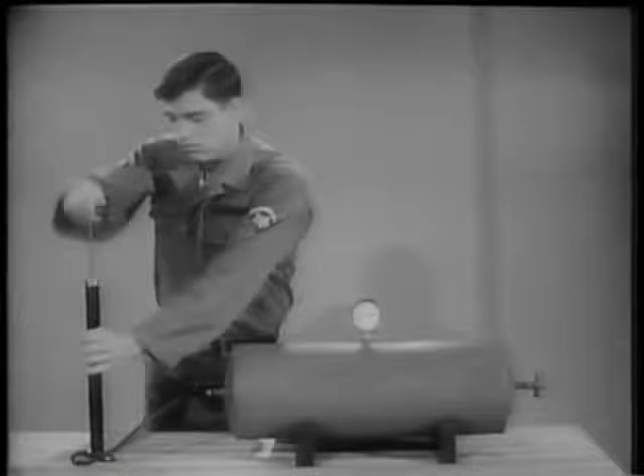Pressure of the air in the tank will increase. More and more air is being pressed into the same space. The compressed air inside the tank pushes against the tank walls and against the gauge.

The tank is a reservoir of compressed air. Even if the pump stops, the tank can deliver an even flow of air by adjusting the petcock.

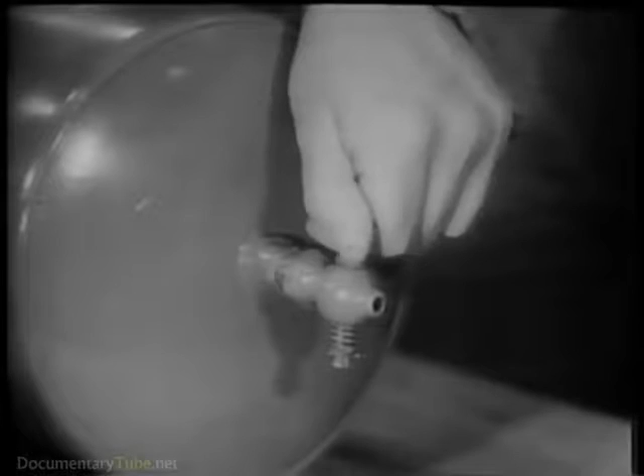As the air pressure escapes from the tank, the pressure will drop. When the petcock is closed, the pressure remains constant. In this case, 25 pounds per square inch, the usual pressure in an automobile tire.

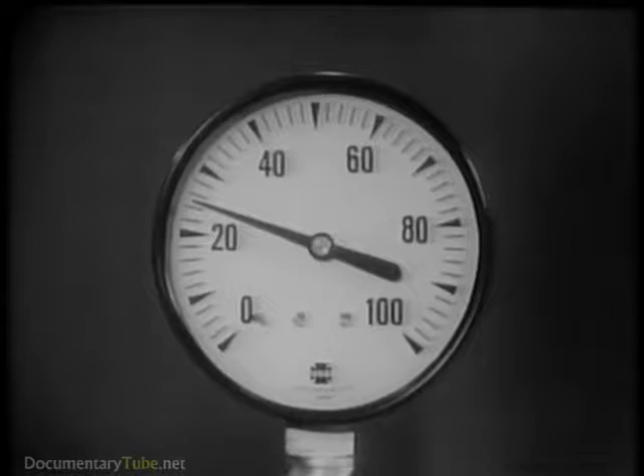This pressure can best be appreciated by showing its equivalent in weight, as demonstrated with this piston and cylinder sketch. 25 pounds per square inch of air pressure is exerting enough force on the bottom of the piston to support a total weight of 314 pounds.

Now, 90 pounds per square inch is the pressure at which air brakes operate. By increasing the air pressure on the same piston to 90 pounds per square inch, we find it will support a total weight of 1,130 pounds. In other words, 90 psi of air pressure is exerting 1,130 pounds of force.

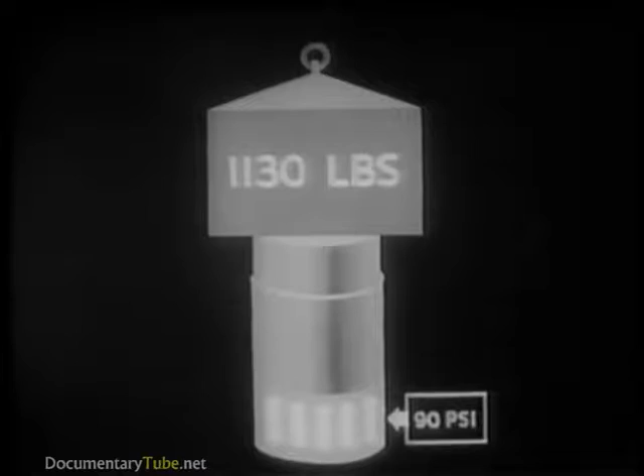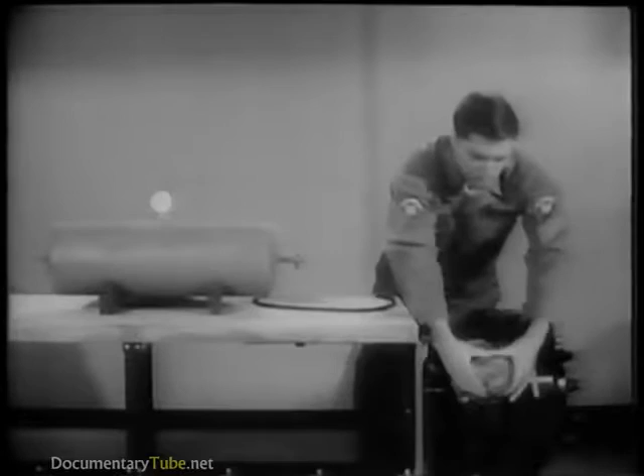How can this force be put to work? Let's insert a heavy rubber balloon into this plastic container and attach it to the wheel braking mechanism. What we're going to do is blow up the balloon so that we can actually see the air pressure, the balloon, pressing against the linkage.

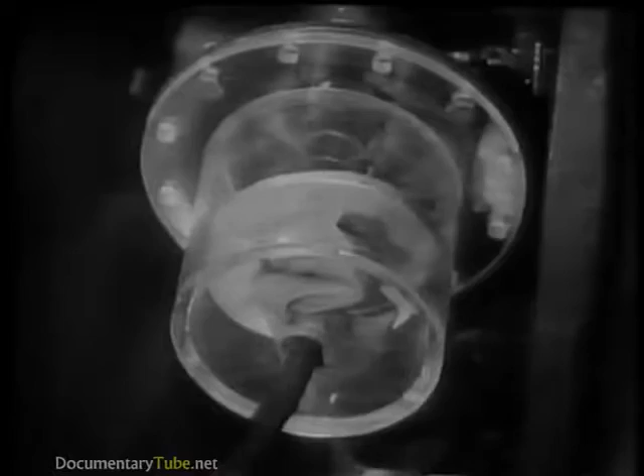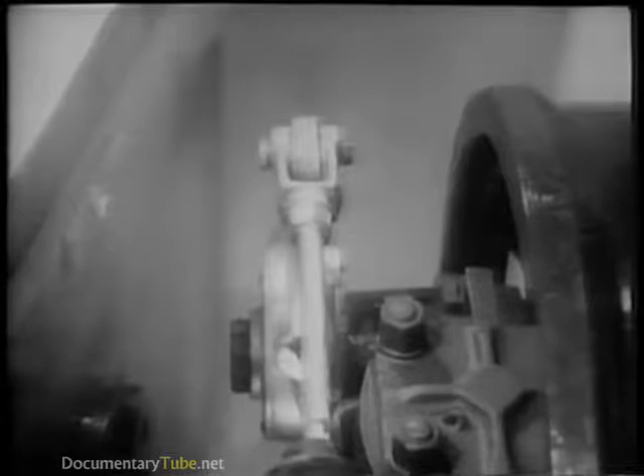We will get our pressure from the air tank, which is simulating the reservoir on large vehicles. The compressed air in the balloon can push the piston and linkage with enough force to actuate the wheel brake mechanism and apply the brakes.

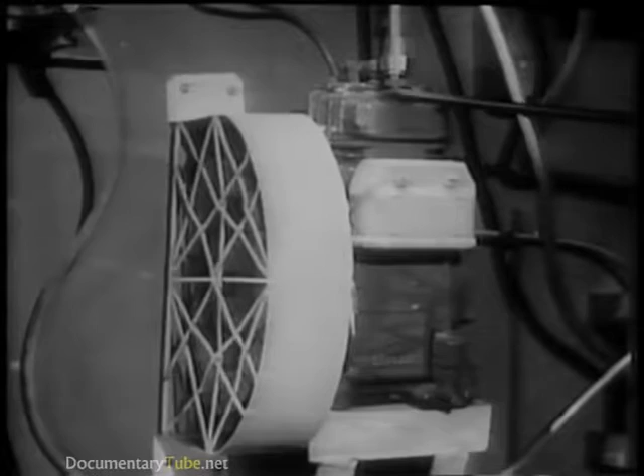The air brake system of an automotive vehicle works just this way. The compressor, which corresponds to the bicycle pump, supplies the compressed air. It is driven by the engine. In this demonstration, we're using an electric motor.

The compressed air is forced into two tanks. These two reservoirs ensure a sufficient supply of compressed air for any emergency. A safety valve is mounted on or near the reservoirs to protect the system and personnel in case excessive pressure should build up.

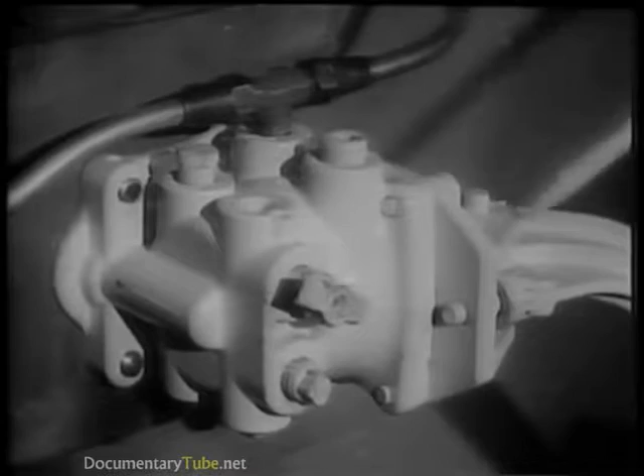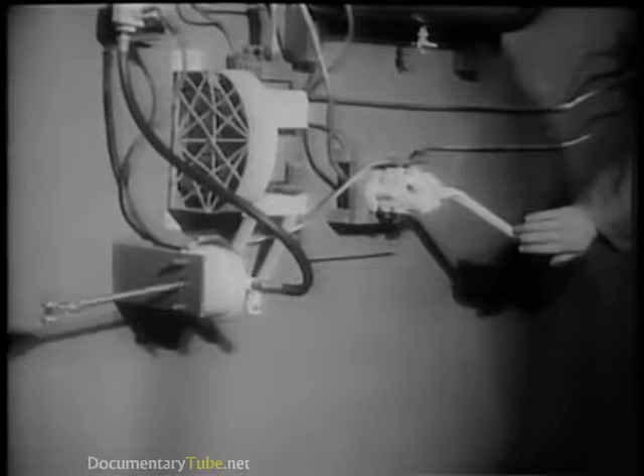Compressed air from the reservoirs goes to the brake valve, which is operated by the foot pedal. This is the brake valve, which is activated by the foot pedal. When the valve opens, air is permitted to rush from the reservoirs through the brake lines into the front and rear brake chambers located close to the wheels.

Each brake chamber does the same job as demonstrated by the rubber balloon. This brake chamber is the air-applied, spring-released type.

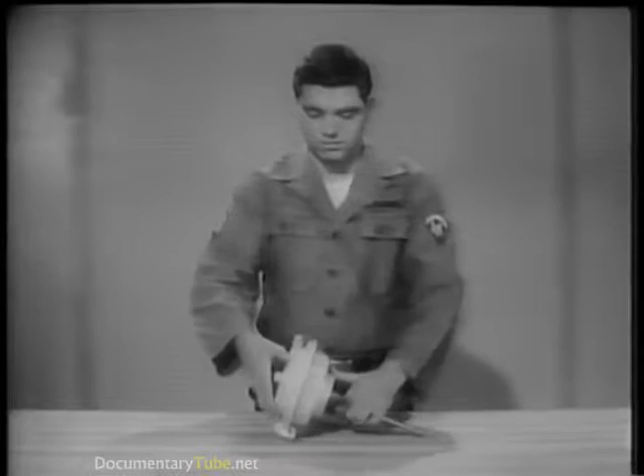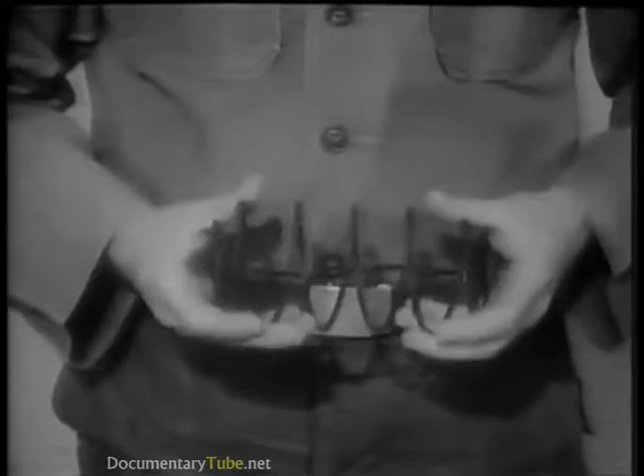Disassembled, it consists of the following components: the end cover and retaining ring, the flexible rubber diaphragm, the piston or plate, and push rod, the piston release spring, the main body and mounting point.

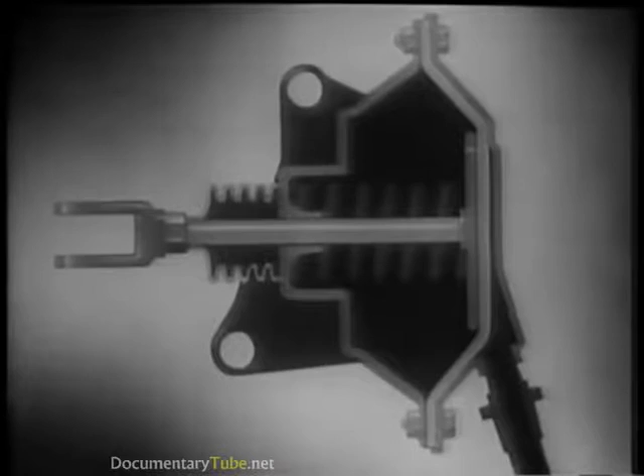The diaphragm will move the push rod plate when compressed air is admitted into the chamber. It operates the brake shoe through the linkage.

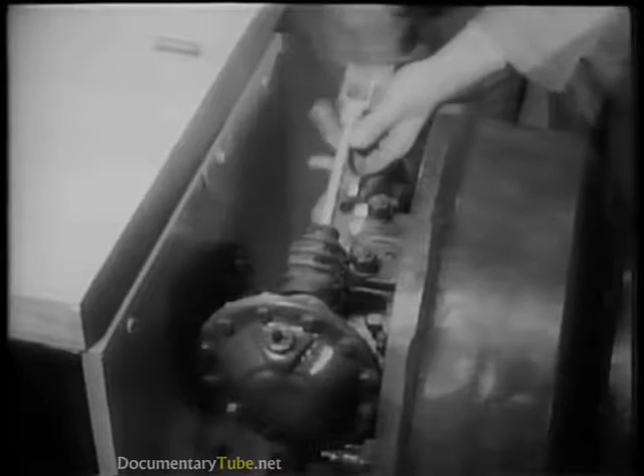The linkage consists of a slack adjuster mounted on a camshaft, and a push rod, which is connected to the slack adjuster with a pin. On the other end of the camshaft is the cam itself.

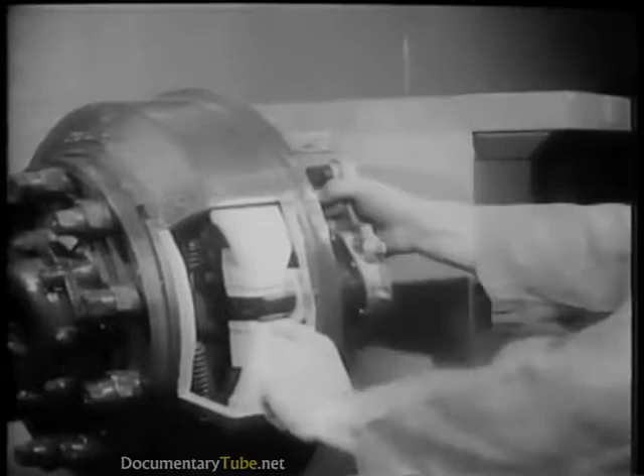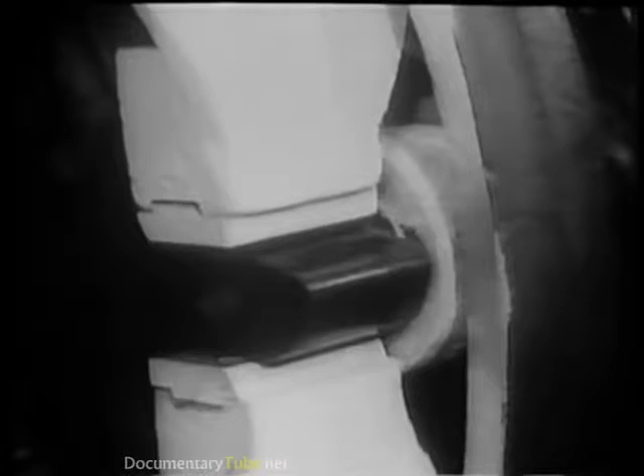When the push rod moves forward, it forces the slack adjuster to rotate the cam. This action spreads the brake shoes against the brake drum and stops the wheels. When the brakes are released, the compressed air in the brake chambers is allowed to escape through the brake valve.

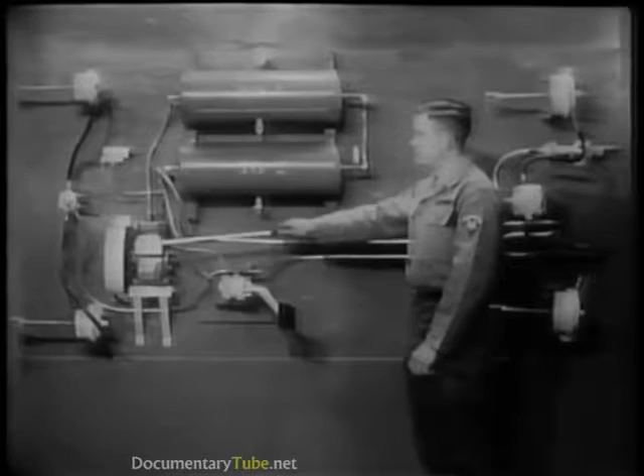It is hardly conceivable that a load of this size can be stopped with just a little air. How an air brake system works can best be seen on this demonstration board. Air enters the system through the air breather on the compressor. The air breather ensures that only clean air enters.

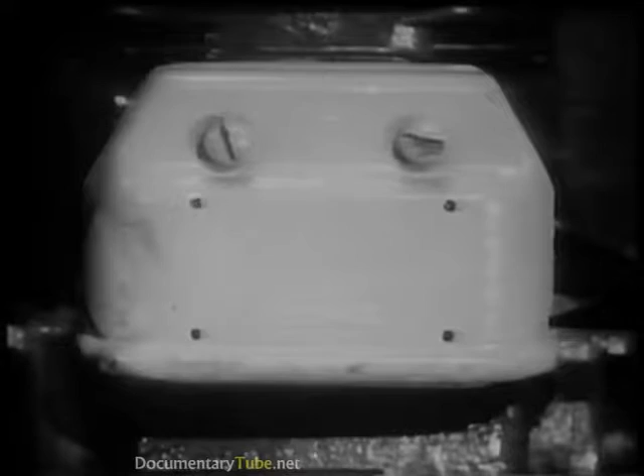The compressor is similar to an internal combustion engine. Most compressors contain 2 cylinders, in each of which a piston is moved up and down by a crankshaft. The holes in the cylinder walls are the air intake ports.

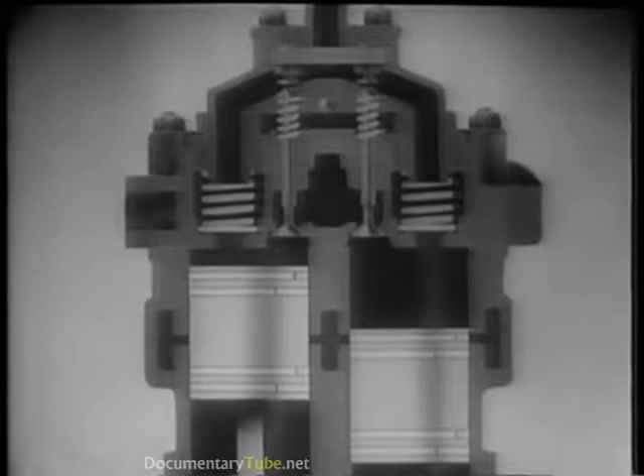The piston serves as the inlet valve by opening the inlet ports to draw fresh air into the cylinder as it nears the bottom of its downward stroke. It closes them to begin air compression on its upward stroke.

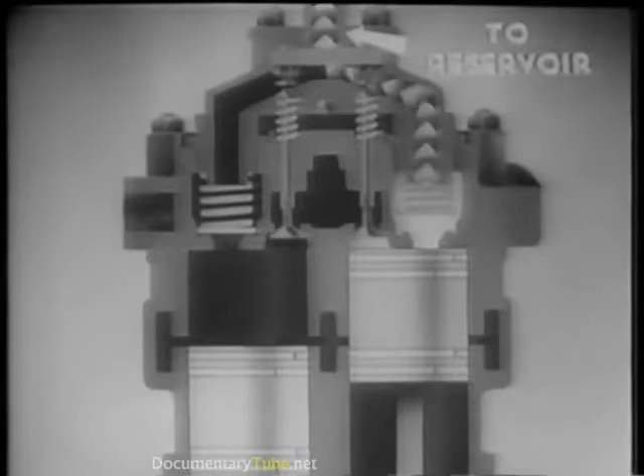When the piston reaches the top of its stroke, the pressure is great enough to open the discharge valve against the pressure of its spring. This forces the compressed air through the line into the reservoir. Watch this cycle of operation carefully.

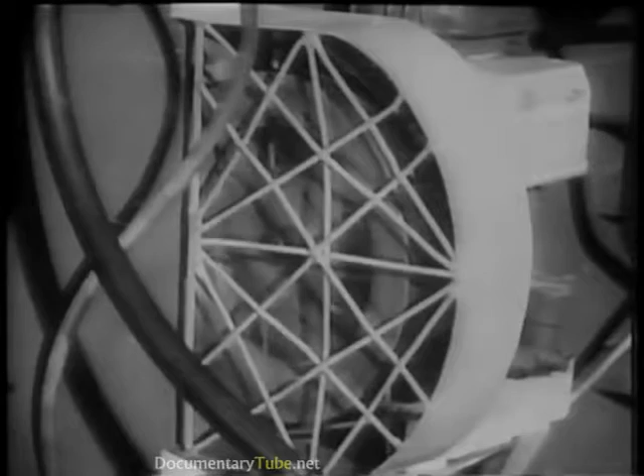Since the compressor is operating continuously when the engine is running, some means must be provided to prevent excessive pressure from building up in the reservoirs and to relieve the compressor of the strain of continuously pumping under load.

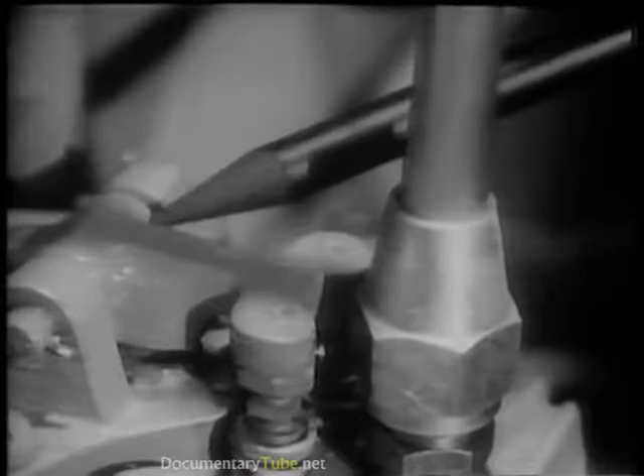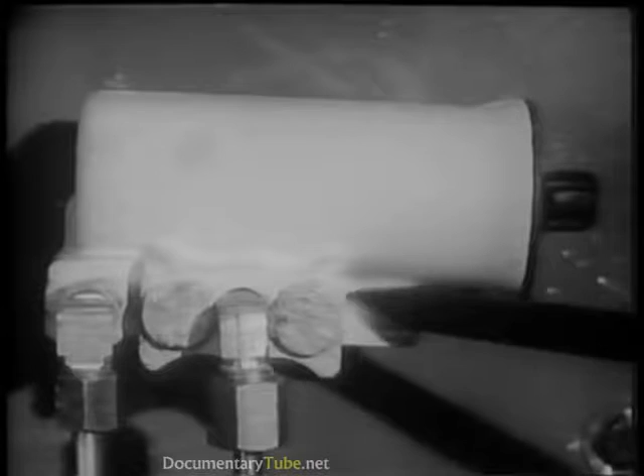That's the job of this section of the compressor known as the unloader head. It is controlled by a governor. The governor is connected between the main compressed air system and the unloader head of the compressor. The governor can be set to operate at a wide range of pressures simply by turning this adjusting screw.

The usual maximum is about 105 pounds per square inch.

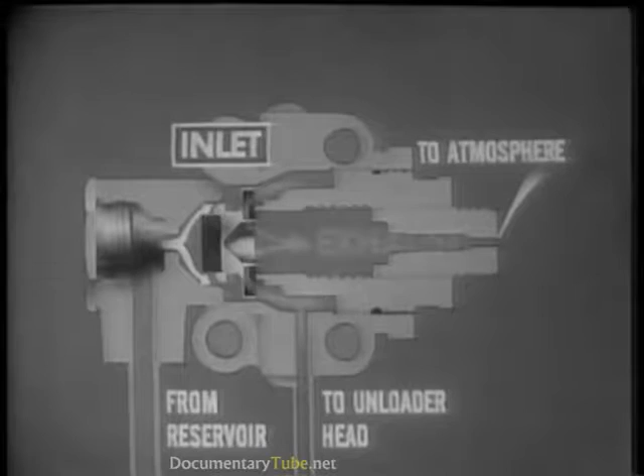Let's look at a cutaway view of a typical governor. The main component is a 2-way piston. This piston incorporates 2 valves, an inlet and an exhaust valve. The inlet valve is held closed by a spring and guide.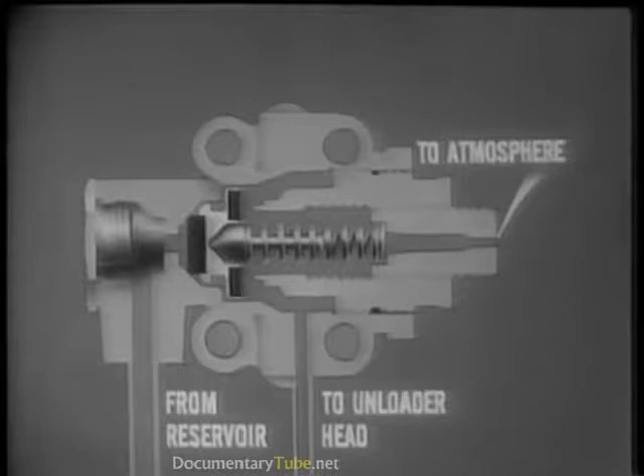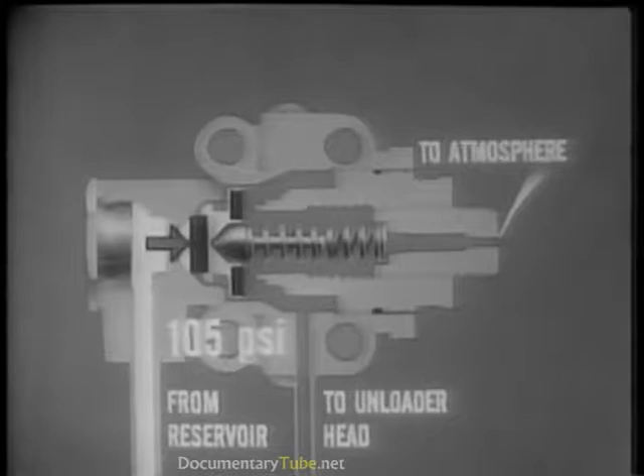Let's see how it operates. When the engine is started, air pressure from the reservoir increases in the system. You'll notice this air pressure is blocked by a spring-loaded valve. As the pressure increases and reaches the governor setting, or 105 psi, it overcomes the spring tension and moves the piston.

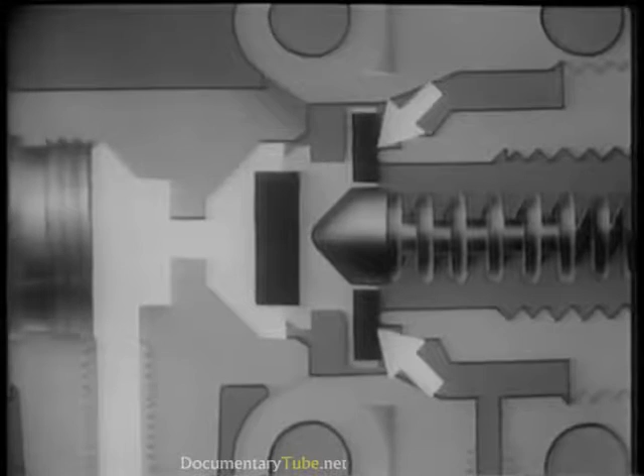Two valves are operated by this piston movement. The exhaust valve is seated, closing the exhaust port. Simultaneously, the inlet valve is unseated and opened, allowing air pressure from the reservoir to move through the inlet port and around the piston and into the unloader head.

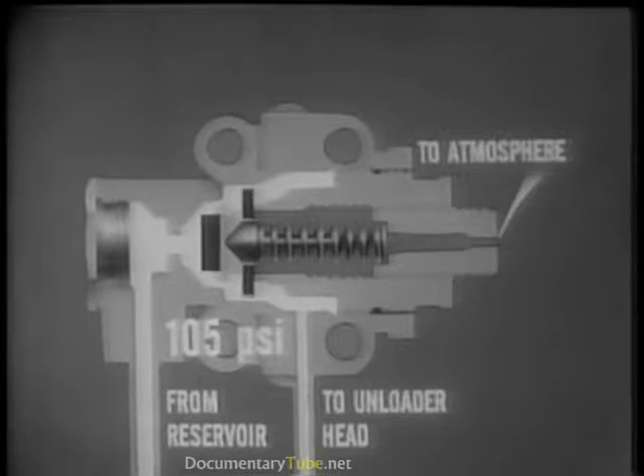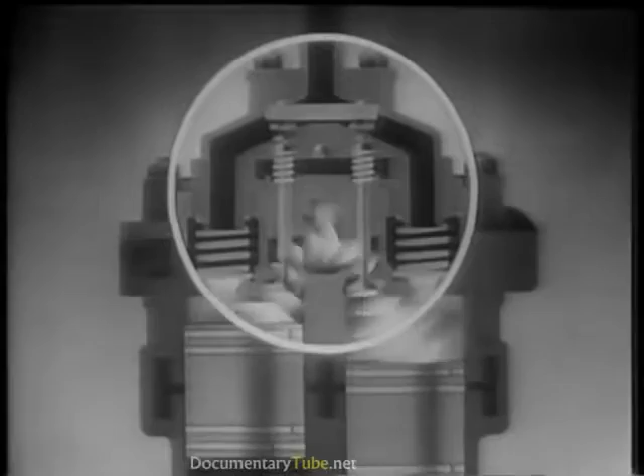This opens the unloader valves through their linkage. When the unloader valves open, the air passes back and forth between the 2 cylinders through the unloader cavity. Not enough pressure can be built up to open the discharge valve against the force of its spring. Air can no longer be forced into the reservoir.

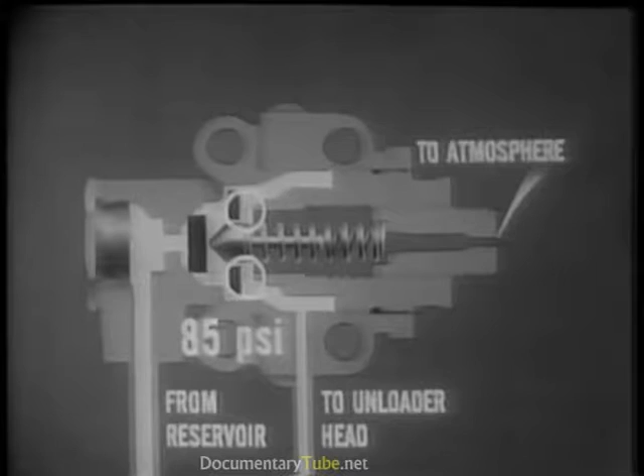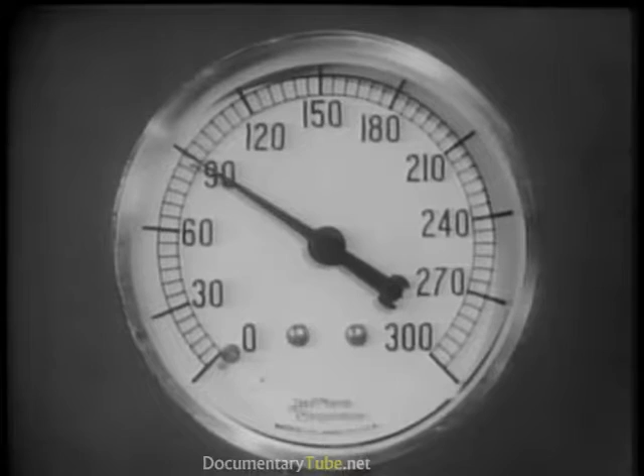This action continues until the pressure in the reservoir drops to a satisfactory minimum, usually about 85 pounds. When this happens, the governor piston returns to its original position. This forces the inlet valve closed and cuts off the unloader head from the reservoir pressure. Simultaneously, the exhaust valve opens, allowing the trapped air to escape through the exhaust port. Compressed air is again forced into the reservoirs, and the pressure starts to rise.

The first reservoir is called the number 1, or wet reservoir. It is mainly used as a moisture trap in which nearly all the water can be collected and drained away when necessary. The number 2 reservoir, the dry reservoir, drains off the remaining water and supplies dry, compressed air to the system. Normally, the reservoirs are drained every day.

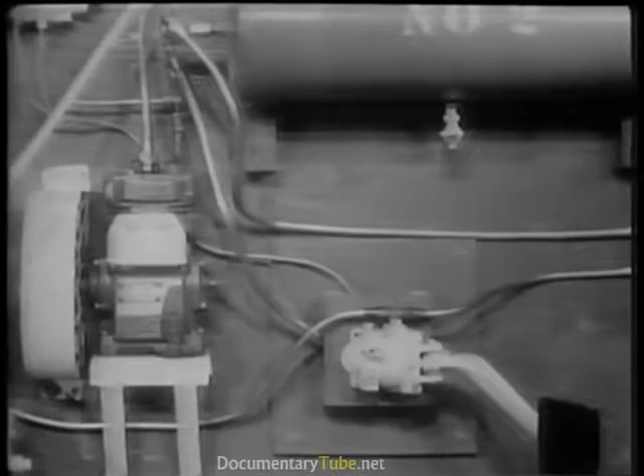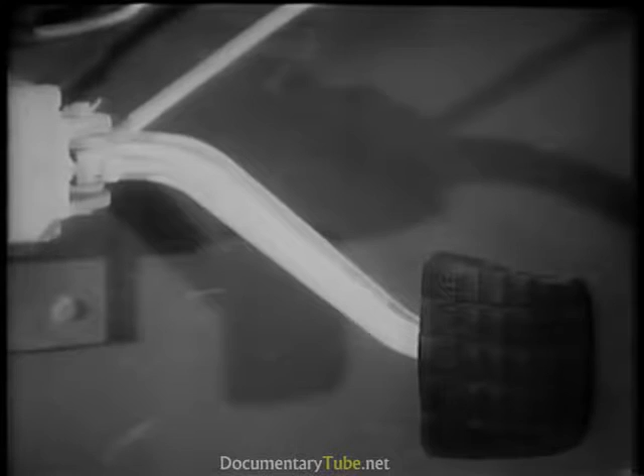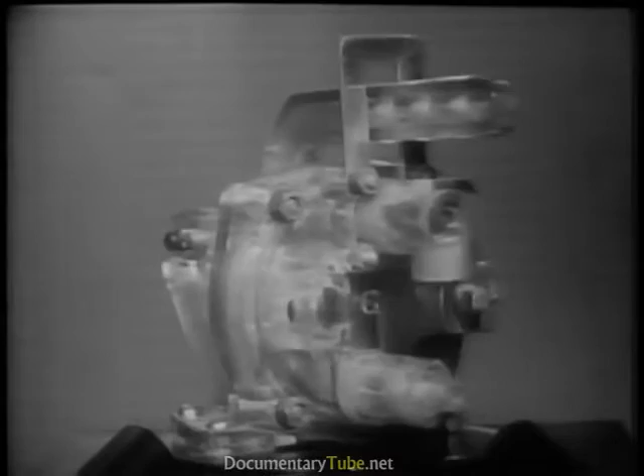The compressed air feeds from the dry reservoir through two lines, one that leads to the air brake valve and one that leads to the relay valve. Both valves control the flow of air to these brake chambers located at each wheel. The air brake valve is connected to the brake pedal. The air brake valve, the heart of the air brake system, meters the required air pressure equally to all brake lines and chambers. This is a plastic mock-up of the air brake valve, sometimes called the brake apply valve.

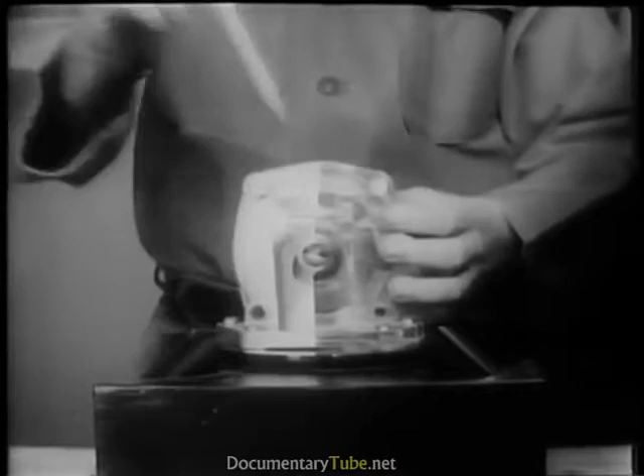Let's disassemble it and find out how it works. The valve is operated by this plunger pushing against a pressure regulating spring assembly.

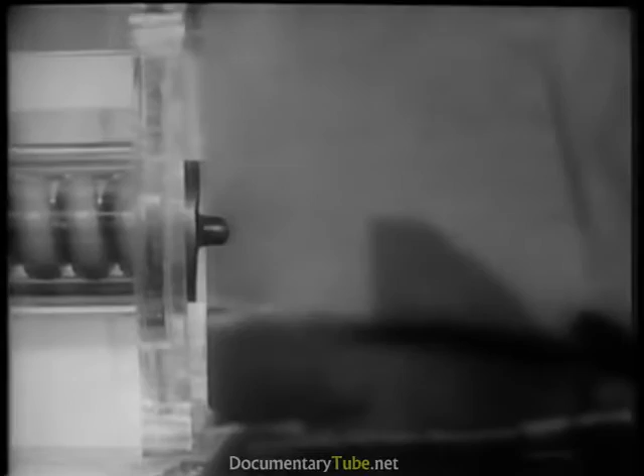This is the pressure regulating spring assembly. The spring pushes down on this airtight diaphragm. The diaphragm operates the rocker below it. This in turn operates two valves, the intake valve and the exhaust valve.

When the brake is applied, air from the reservoir enters the intake valve. The exhaust valve permits the air to escape when the brakes are released. Let's stand it up now and look at a sketch of the action.

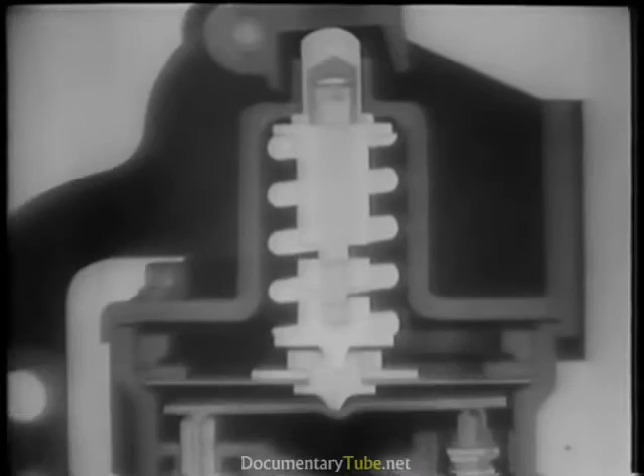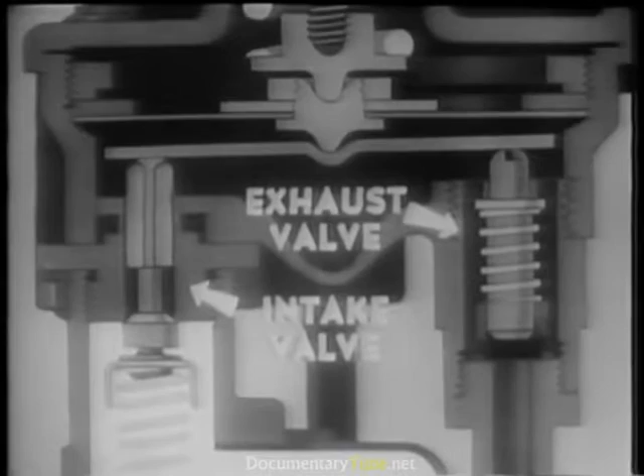When we press down on the brake pedal, the pressure regulating spring assembly forces the diaphragm down. This pushes down on the middle of the rocker arm, forcing it down. As the rocker arm moves down, it pushes against the tops of the two valves. Because the spring of the exhaust valve is weaker than the spring of the intake valve, the exhaust valve moves down first. This closes the exhaust port.

As soon as the exhaust port is closed, the rocker arm pushes against the intake valve until it opens and compressed air rushes in from the reservoir. The compressed air can't escape through the exhaust port because it is closed. It takes the only other route open, through the brake lines to the brake chambers. The pressure in the brake chambers and the air lines becomes the same as the pressure under the diaphragm.

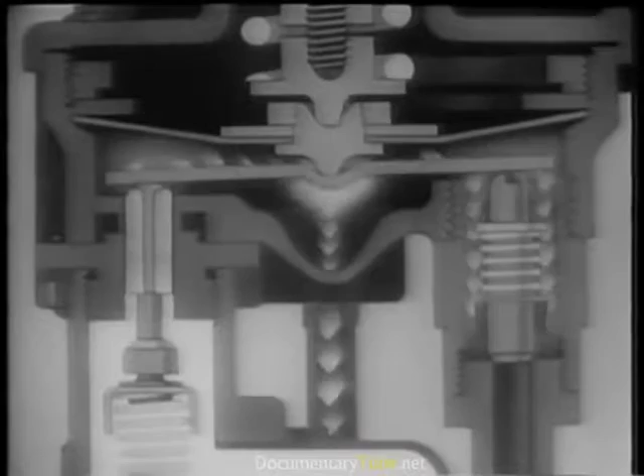Compressed air flows from the reservoir into the valve chamber until the force of the air pushing under the diaphragm becomes just a shade greater than the force of the spring assembly pushing down on the diaphragm. This forces the diaphragm up slightly.

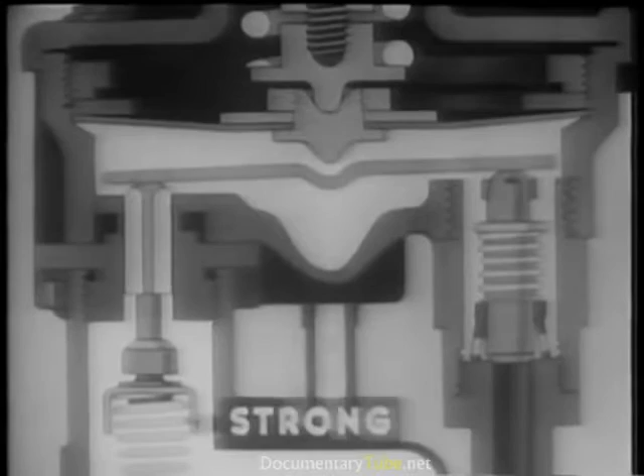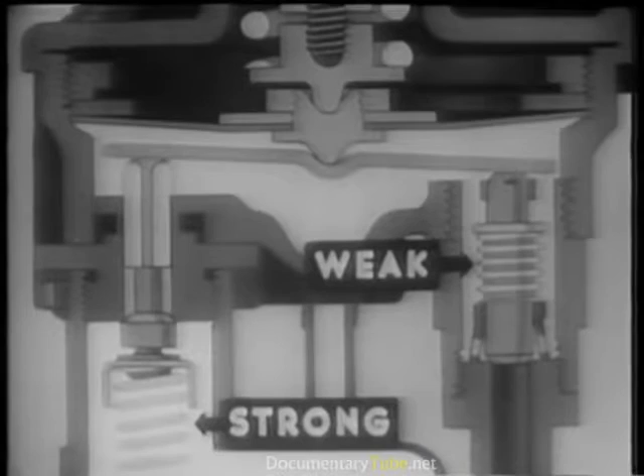Because the intake valve spring is stronger than the exhaust valve spring, the intake valve moves up first. This closes the valve and stops the increase of pressure. But the exhaust valve remains closed. Its spring is too weak to overcome the force still pushing down from the brake pedal through the spring assembly. This is known as the lapped or balanced position.

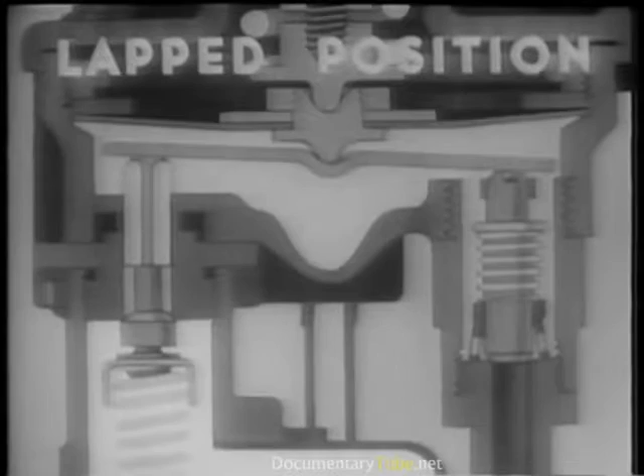In the lapped position, both valves are closed. As long as the driver's foot pushes with the same force on the brake pedal, the brake valve will remain in the lapped position, and the pressure on the brakes will remain constant.

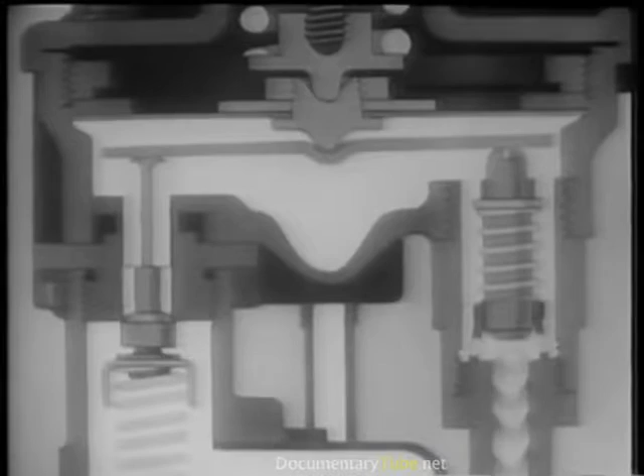If the brake pedal is now pushed down further, the valve will come to another lapped position, with a greater air pressure under the diaphragm and on the brakes. If the brake pedal is released a little, the exhaust valve will be allowed to open until the valve comes to still another lapped position. This results in a lower air pressure to the wheels.

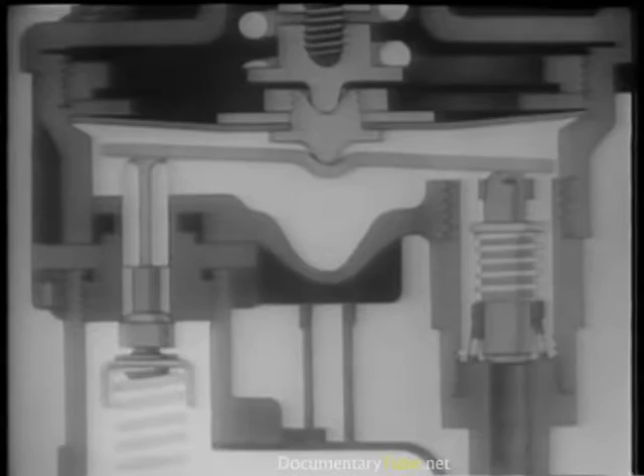When the foot is taken off the brake pedal, the spring assembly is no longer pushed down upon the diaphragm and the rocker arm. The exhaust valve opens, allowing the air in the brake chambers and under the diaphragm to escape to the outside.

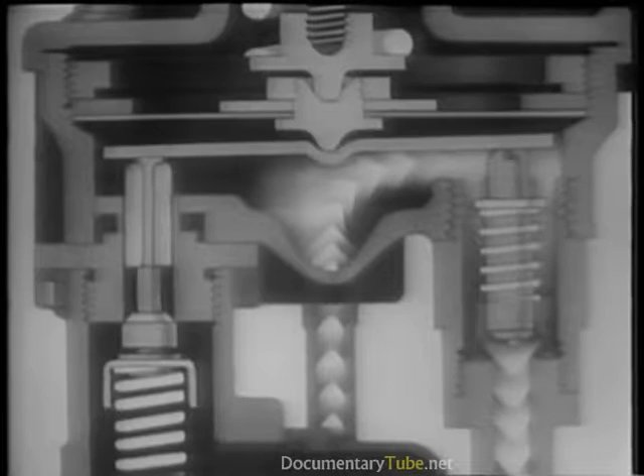You can't see the air escape when the brake is released, but a spoonful of powder held under the exhaust valve shows what happens.

The front brake chambers are so far from the brake valve that the brakes will drag while the air is escaping through this long route. To prevent this drag, a quick release valve is used.

This valve is located close to the front brake chambers and allows the air to escape much faster. When the brake pedal is pushed down, air rushes in from the brake valve, pushing the diaphragm down. When the diaphragm moves down, it cuts off the air escape to the outside. The compressed air surges through the two side ports, each of which leads to the brake chambers.

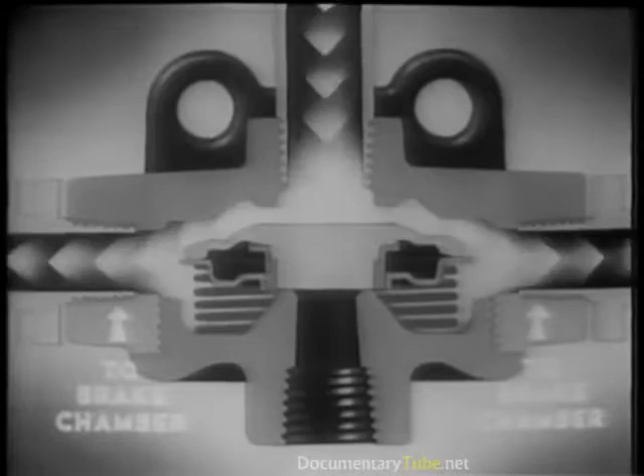When the pressure above and below the diaphragm is equal, the spring closes the inlet port. The center of the diaphragm keeps the exhaust port closed. This is the balanced or lapped position.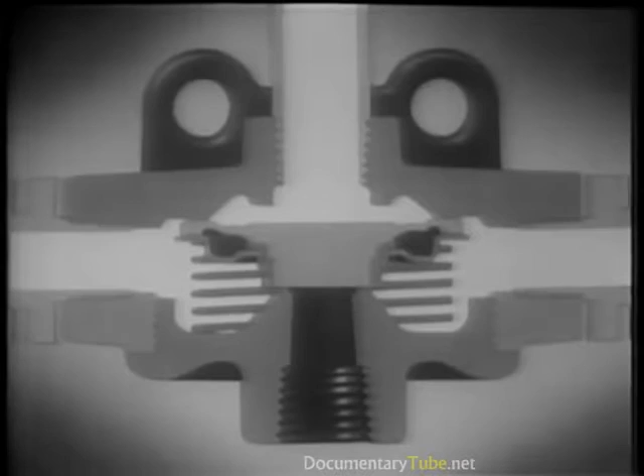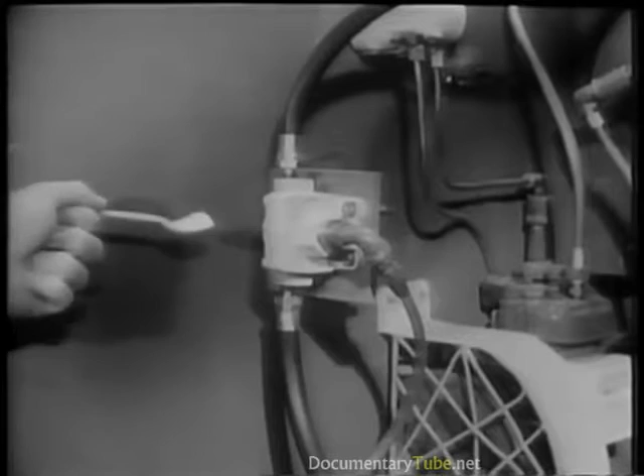When the brake valve is released, there is no pressure above the diaphragm, so the spring is able to return the diaphragm to its seat. This blocks off the passage back to the brake valve, but opens up a shortcut that leads directly to the outside. The air in the brake chambers escapes quickly, without traveling the long route through the air lines to the brake valve.

On long wheelbase tractor trailers, the front brake chambers are close to the brake valve. The rear brake chambers are a long distance away. Yet the rear brakes must be applied at the same time as the front brakes and must release as quickly.

The relay valve provides quick response for the rear wheels. It provides a direct compressed air feed from the dry reservoir to the relay valve and then to the rear brake chambers. This air feed is regulated through the control air line by the brake valve.

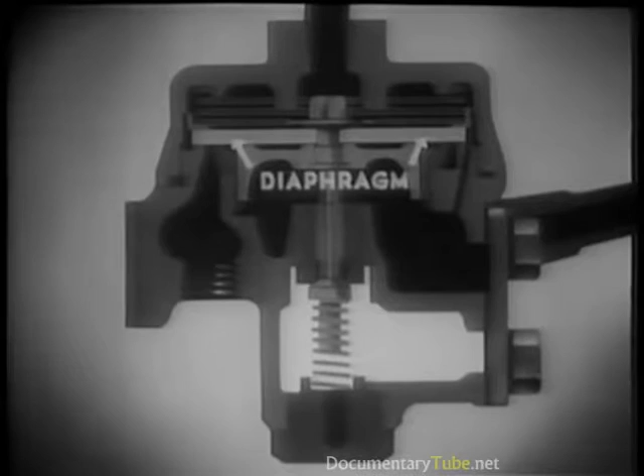Here is the action that takes place. When the brake valve operates, air under pressure is delivered through the line to the relay valve. The air enters the cavity above the diaphragm, forcing the diaphragm down and opening the intake valve.

Simultaneously, the exhaust passage is closed, preventing the air from escaping. Instead, it rushes through the side ports into the rear brake chambers.

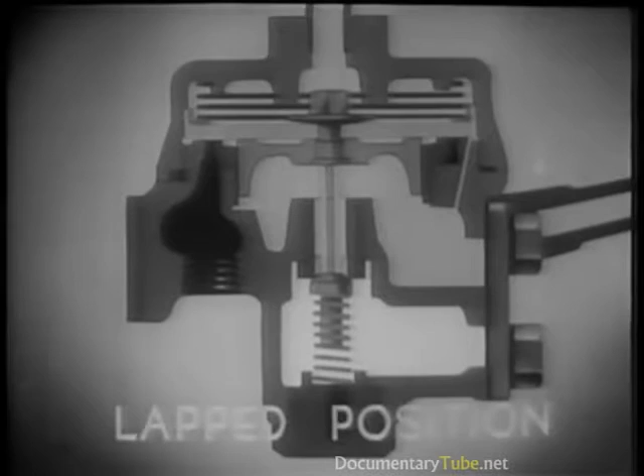As soon as the air pressure above the diaphragm is equalized by the brake chamber air pressure, the diaphragm is raised into its lapped position, maintaining the same pressure in the rear brake chambers that is maintained in the front brake chambers. Each time more pressure is applied or pressure released, a new lapped position is reached.

After a long period of service, wear may produce a slight variation of pressure above and below the diaphragm. The bleeder or bypass port corrects this error.

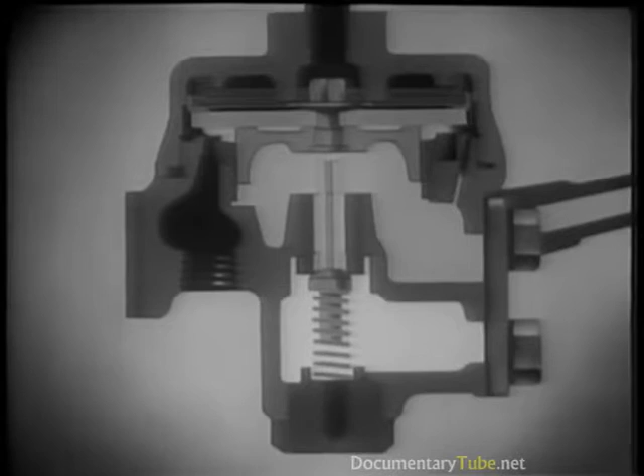When the brake pedal is released, the air above the diaphragm escapes by way of the brake valve. The pressure below forces the diaphragm up. This opens the exhaust port and allows the air in the brake chambers to escape directly.

All these actions take place at the same time. They have been slowed down for the sake of clarity.

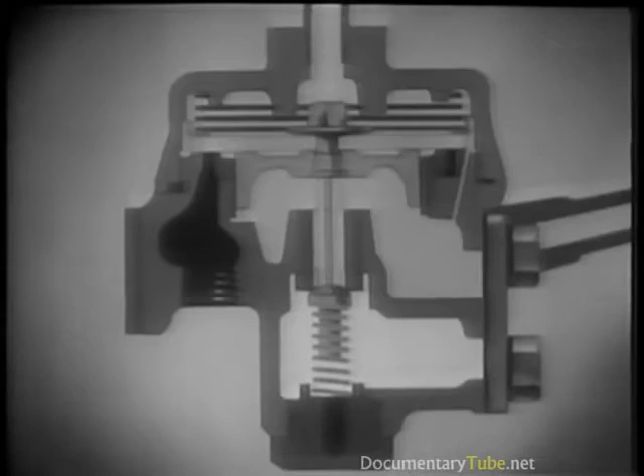Watch how quickly this happens in normal operation. When the brake pedal is released, the air from the rear brake chambers escapes through the relay valve.

The air brake line quick disconnect points are located between the tractor and the trailer. An emergency brake line is mounted on the right side of the vehicle. A service brake line is on the left side.

When the trailer is separated from its tractor, or when the units are coupled and the air supply disconnected, safety brakes are automatically applied to the trailer wheels. As long as there is air pressure in the trailer reservoir, this safety feature prevents the trailer wheels from rolling.

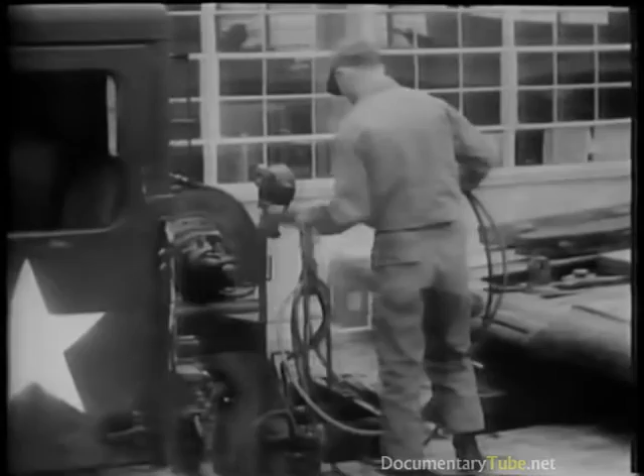When the tractor air supply is again connected to the trailer, its pressure is applied to the emergency relay valve on the trailer. This valve releases the safety brake and permits the trailer wheels to roll.

Now let's see how each unit of the air brake system is mounted on this tractor trailer. The compressor is mounted on the engine.

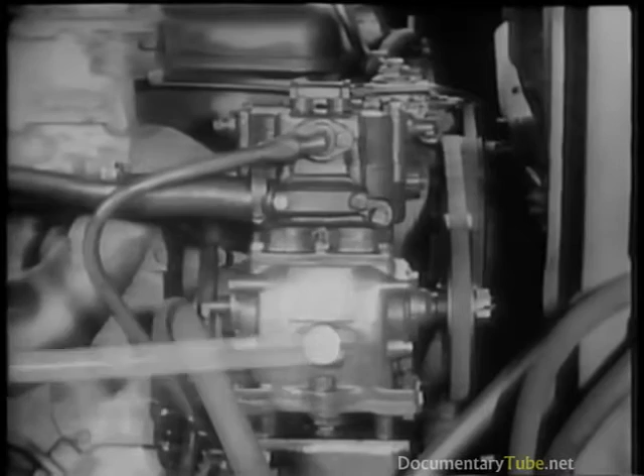The unloader head on top of the compressor is regulated by the governor, which maintains the required pressure in the compressed air reservoirs.

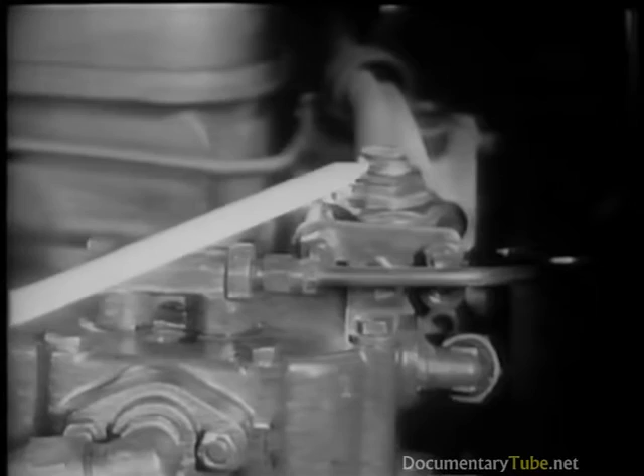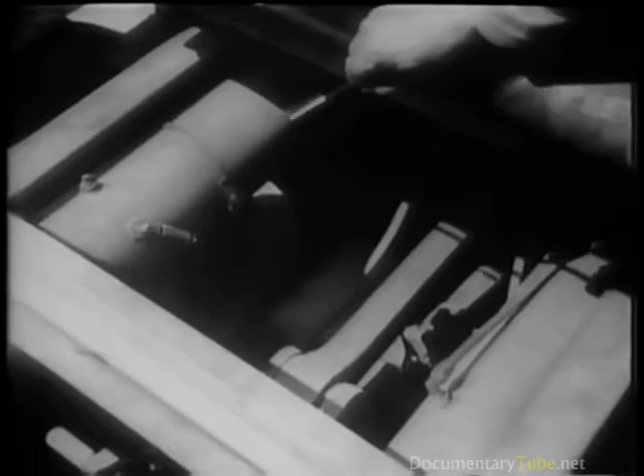On the back of the tractor, the reservoirs are mounted on the chassis. They trap the moisture in the air and store a ready supply of air at the required pressure. A safety valve is mounted on one of the reservoirs.

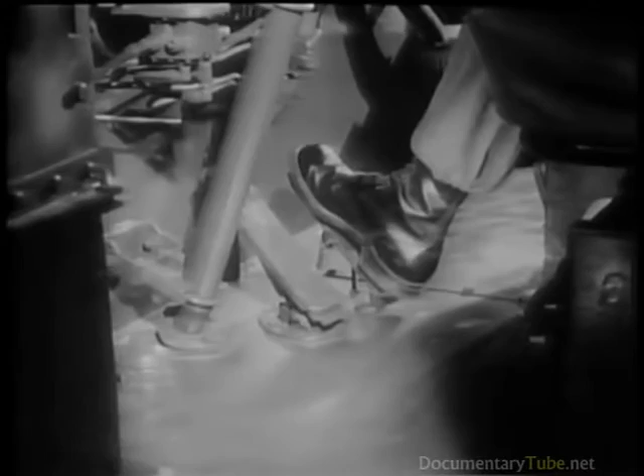Near the rear wheels, the relay valve provides for quick application and release of the rear brakes. Mounted under the brake pedal and under the cab floor is the air brake valve, which regulates the pressure required at the brake chambers.

The brake chambers are mounted near the wheels. They actuate the braking mechanism. Located between the front wheels is the quick release valve. It provides a quick exhaust.